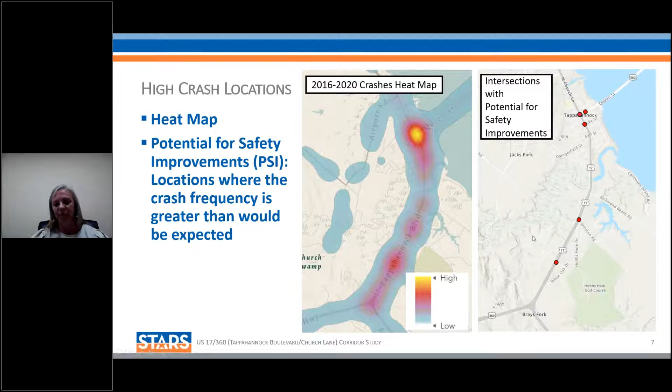All right, so that survey I mentioned—hopefully many of you took that survey last spring, we'll ask you about that in a little bit—ran from May 7th through June 4th, and there were over 1,100 participants, which is good participation for a survey of this type.

Having a little trouble here getting the next slide, but do you guys still see my screen? We do, yeah. There we go, next slide. Okay, so more survey responses.

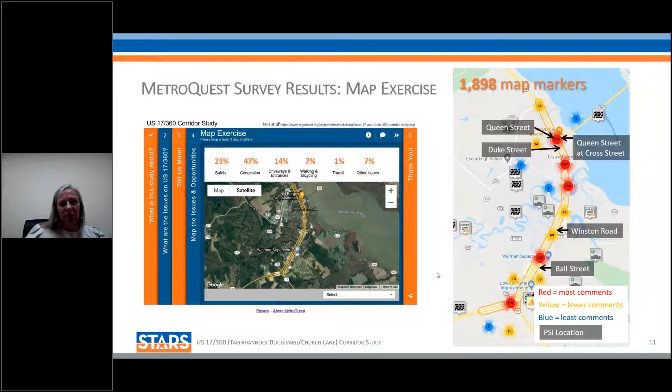This map indicates where all the markers were placed, covering all the different issues. For those who drive this every day, it's probably not a surprise that the highest number of markers were placed up at Queen and Cross. They decrease as you go south near the Winston Road area, then just north of the creek at that bridge, coming down to the Walmart, Ball Street area, and then to Brays Fork. We also have these responses broken down.

Bear with me. There we go—I think we skipped a slide. There we go, sorry about that.

Broken down by issue, this generally reflects the same trend as the total slide, which makes sense since these added together make that slide. For the congestion issue, the main concentration is right at Queen and Church, and then a bit further south near the Winston Road area intersection, tapering off as you go south.

For safety, the main location was also noted at Queen and Church, with a secondary cluster at Winston, then jumping down to north of the creek, the PSI locations, and Brays Fork. For driveways and entrances, there aren't as many markers, so fewer specific locations were marked—the same is true for bike, ped, and transit. Most concern about driveways and entrances is further to the north.

This one's a little interesting: the markers surround the Queen and Church intersection instead of being right at it, and continue in similar locations to the south. Bike, ped, and transit is very similar—markers for needs in the downtown area were the main focus, tapering off as you go south.

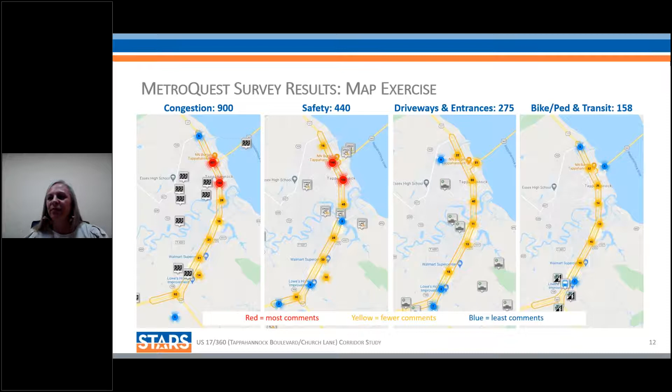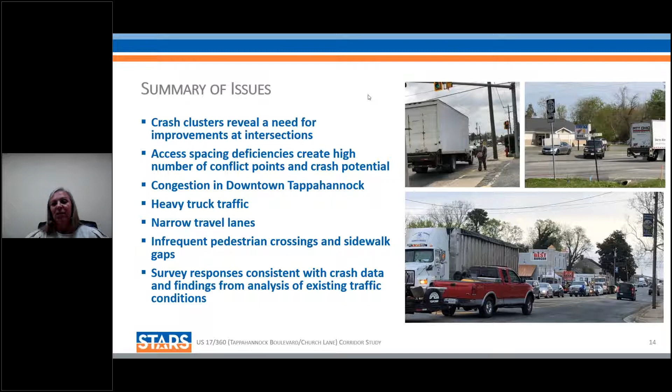One of the other issues noted was the need for pedestrian facilities, with infrequent crossings and sidewalk gaps. You can see in this picture of this woman walking, it'd be nice if she had a little more protection, and there wasn't a utility pole right in the middle of that sidewalk. One of the good things is that the survey responses were consistent with what we found in our analysis. There weren't surprises, so it gives us a better focus on what to address.

All right, so now we've talked all about the problems and what everyone has seen out there. So let's talk about some solutions.

All right, so you all know this corridor really well since you drive it every day, and you can picture the very distinct portions of it. So what we've done to talk about the solutions is broken it into different areas with very different characteristics. We're going to focus on the downtown Tappahannock area, and we have a couple options to discuss there, including some one-way streets and another option we call partial quadrant.

Then we're going to jump to the south and talk about the Brays Fork area, where we have two options, including a roundabout and a green T. And then the area between Richmond Beach Road and north of Brays Fork, that we're calling the south of Hoskins Creek area, where we have some access changes, median modifications, and pedestrian improvements to show you.

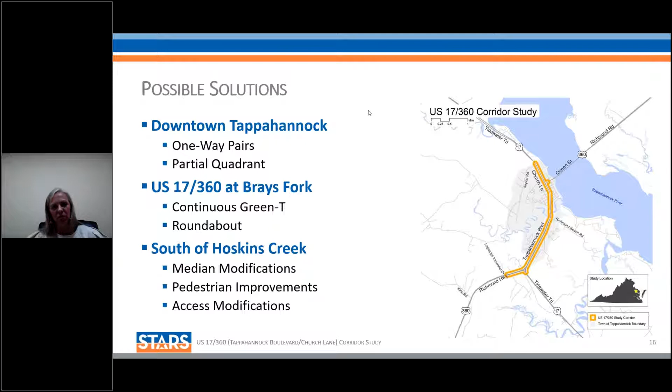All right, so now talking about downtown Tappahannock. This area, this blue circle up here, so you don't lose track of where we are, that is what we're starting with.

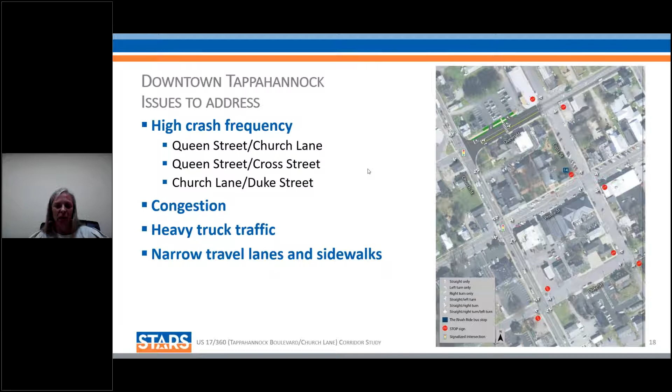Back to the issues here, the high crash frequency. This is the area with the most PSI locations, one being Queen and Church, one being Queen and Cross, and the other being Duke and Church. This is also the location in the corridor with the greatest congestion, focused around that Queen and Church intersection. Truck traffic and narrow travel lanes are also challenges in this area.

Many traffic studies focus mainly on congestion. In this case, safety is a bigger focus. However, in this portion of the corridor, congestion does play a greater role.

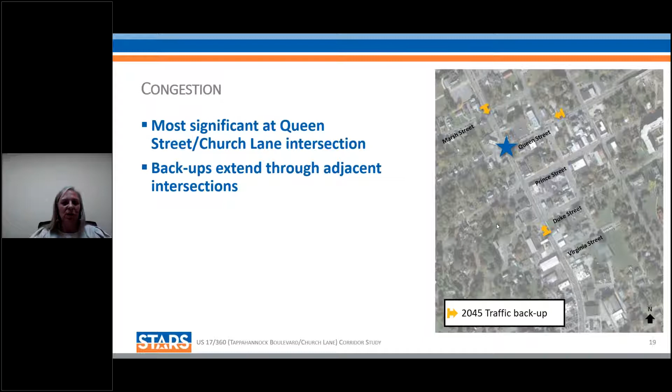We looked at many different options here, and we're not going to go through all of these with you because many of them turned out not to be viable. But just so you know, many things were considered before we arrived at the alternatives we're going to show you.

One of the things we looked at were conventional turn lane improvements — what happens if you change one lane to a through and a right, or add two left turn lanes, things like that. What we found is it was very challenging because of the trucks to effectively address that, since they need so much space to turn. So there weren't very many of those options. Also, when you start changing lanes, the congestion got worse and those backups I showed you were quite a bit longer.

Another option we looked at is what we call the road diet, where you slim down your roadway. Church Lane in this area is four lanes, two per direction, two northbound, two southbound. For one of the road diet options, we took that down to one lane northbound and one lane southbound with turn lanes. You can probably picture that here at Church and Queen it would seem helpful to have just one northbound through lane and one northbound right turn lane. Unfortunately, what we found is there's just too much traffic on this road to be handled with one lane per direction in the throughs.

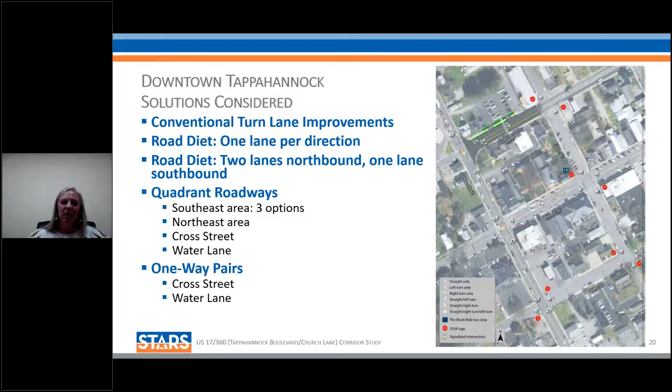We also looked at one-way pairs, the idea of creating a network of one-way streets in this kind of downtown area. I'll get into more detail about that too.

So, one-way pairs. There are a lot of words here — I'll walk you through them, you don't have to read them, though you can if you want for reference. What this option does is convert Church Lane from Queen down to Duke to one-way southbound. It also converts Cross from Duke to Queen to one-way northbound, so you can get your northbound and southbound traffic using those two roadways. On Queen Street, from Cross to Church, traffic is only allowed in the westbound direction, away from the bridge.

To offset that, on Duke Street, traffic is allowed in the eastbound direction only, from Church to Cross. So if you're coming from Brays Fork, headed north, you would come up to Duke Street, turn right, then turn left on Cross Street, and assuming you're headed over the bridge, turn right on Queen.

If you wanted to just go north, you would similarly turn right on Duke, left on Cross, then turn left on Queen and go around. That is the most circuitous or out of the way movement of those in this area.

Some other things worth noting here are that if you're coming from the north and headed south, you cannot turn left onto Queen Street. This movement is forced to come down and make the left at Duke and then come around. So that's another movement that becomes a little longer in this option.

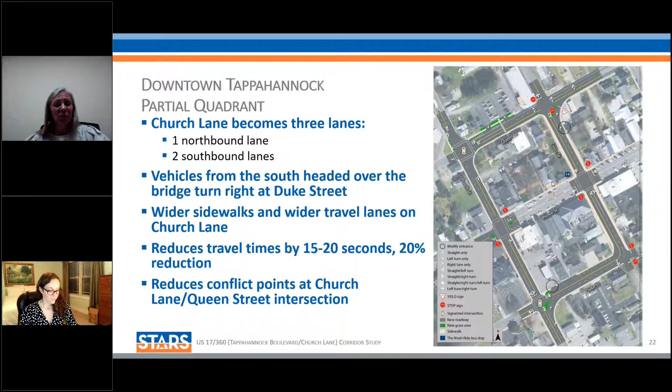Cyan says, are you suggesting that traffic, including 18-wheelers, be diverted through the residential and historic areas? Yes, that is what we're suggesting, and that is why we want to get your input on these ideas, because it's a change and it's different.

And this is the downtown area. Margaret Taliaferro asks, have you addressed the possibility of a truck route around town? I have heard discussions, not related specifically to this project, about a bypass around the area, which I believe is what you're referencing. Maybe someone from VDOT can address that at the end of the presentation, since they have more background than I do. That is not something we are specifically looking at in this study.

Good. Let's see. John Harvey asked, have you considered the fact that traffic coming from Fredericksburg will want to cut through and take a left on Prince Street?

Not necessarily specific to Fredericksburg, but coming from the north, you can see there are some restrictions here, which isn't intuitive. These little islands are intended to force you to go down to the signal at Duke and make the left there — or in this case, you can turn left at Queen. We're trying to create these alternatives so they don't take Prince, and instead actually get them to take Duke. So yes, we have thought about it and are trying not to let it happen with the design.

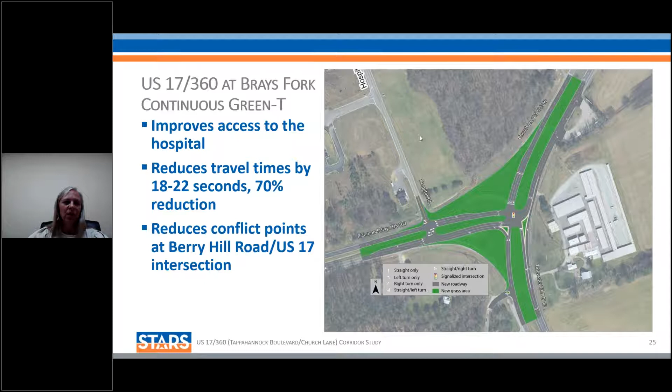And the second option being considered is a roundabout.

Similar to the continuous green T, if you're coming from the south going north, you get to keep going. You don't go through the roundabout, you just carry on and eventually merge back in with these vehicles. If you're coming from the south headed to the hospital, you come through the roundabout and have the right of way, so you can choose that outside lane and hop in the right turn lane to turn right at the hospital. So it addresses that issue.

This also reduces travel times. I'll go through the rest of the movements. Eastbound, the right turns don't go all the way through the roundabout. They still come around at a little tighter angle, which slows things down and improves the conditions at Berry Hill.

This location, for this opportunity, we also remove that crossing at Berry Hill. But this one also reduces the travel times. Things operate very nicely and smoothly from an operations perspective. It also reduces the number of opportunities for cars to collide, because roundabouts generally reduce crashes due to a combination of reduced speeds and the reduced number of opportunities for vehicles to cross paths.

And with that, I think we have another survey.

For Brays Fork, which of these concepts do you like the best? The roundabout that Jeannie just talked about, the continuous green T intersection that keeps the signal but is configured a little bit differently, or do nothing?

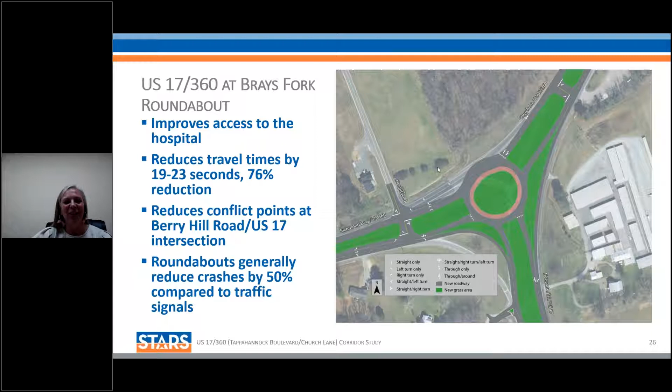So what were the issues down here? There are two intersections in this stretch from White Oak to Richmond Beach Road that had higher crash rates than expected, the PSI locations, one at Winston Road and the other at Ball Street. Also in this area, there are some closely spaced access points, which I'm going to highlight in a different analysis in a moment. And there's a lack of pedestrian facilities. There aren't any sidewalks, it's very hard to cross even at the signals, so it's just not a pedestrian-friendly area.

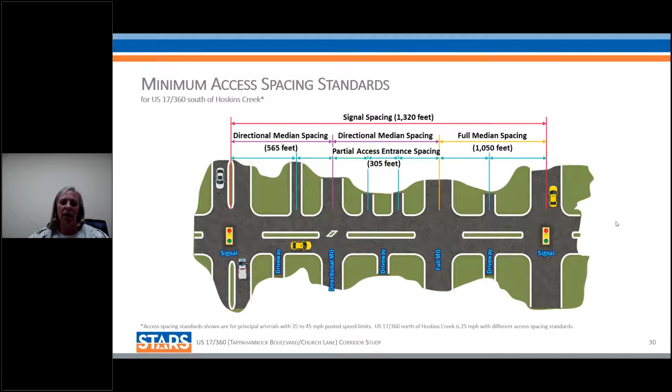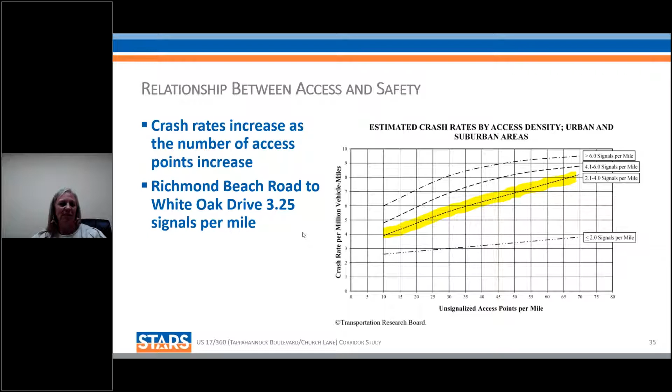All right, so all of that to get to this. I realize this is small and there's a lot of information, so I'm going to try and hit on the high points. Also, all of this information is on the project website if you want to get further into it, and you can provide additional comments, and we'll show you where to find that.

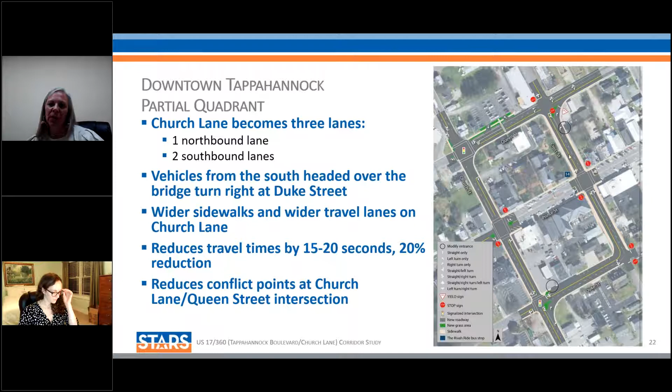This is the partial quadrant option that I'm showing right now. Here at Cross and Queen, for those who may not be as familiar with what Eric's asking, this is actually a free flow right turn, so you don't have to stop, and that allows for enough capacity that you don't need two right turn lanes. Going down, this one is yield controlled and it's enough. I think what we found is the traffic volumes in that northbound direction are almost split half through and half turn right, so separating them out a little bit increased the capacity enough at the intersections that it worked.

Does that answer your question, Eric? It answers my question, I guess. Agree to disagree. Reasonable minds differ, and I think for future traffic flows you'd want two right-hand turn lanes, but if that's what y'all came up with, then I guess we'll just agree to disagree.

Sarah Lavica asks, I think this is in regards to the downtown area, how about a roundabout in the downtown area?

So we did not consider that based on space. A roundabout takes quite a large area, and given the historic nature here, it would have taken out a number of these properties to fit one in, especially given the truck traffic having to maneuver through it. So no, we did not consider a roundabout downtown.

Okay, a few comments here that I will read. Margaret says that overwidth machinery, such as farm equipment, is an issue that needs to be addressed.

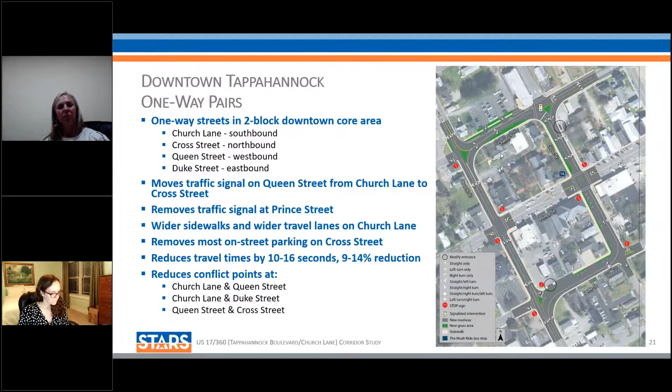Thank you for those comments. This one is about the Winston intersection: the Winston intersection changes have increased congestion at the next northern intersection, and it needs lines.

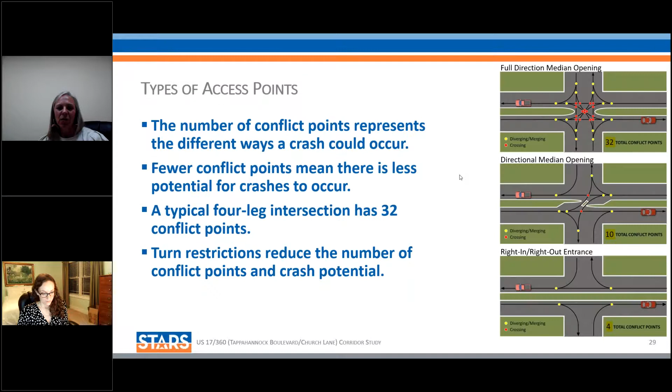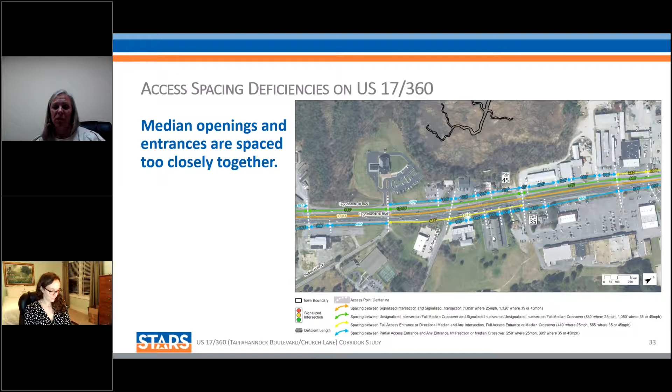My guess is maybe the markings have not been placed yet. Here at Winston, yeah, it may still not be marked, that's possible because it's very recently constructed. And yes, it is possible that there is more congestion at the next intersection because traffic volumes shifted, especially to make that U-turn. It's one of the challenges, making sure that it's a system that works together.

Great. I'm going to keep rolling here to read the questions and comments that keep coming in, but I'll also invite the other panelists, Stephen, Linda, Pavneet, if anyone would like to jump in with a response, feel free to do so.

This relates to downtown: a few of the power lines that cross the downtown grid are not even close to regulatory height to accommodate tractor trailers, one reason, aside from the turns, that they avoid them at present. We have even set regulations on what we can accept for the Christmas parade because of the lines hanging low across the streets. Sorry for all the input, but I think the Hoskins to Brays option is great, but downtown needs more research and holistic solutions based on existing ground conditions that better consider detrimental impact.

Thank you, we like the feedback. Yes.

Travis notes, and Travis, you may need to help give a little more context to this comment, he says you cannot get to the plumbing supply store from the parking lot. Do you know what Travis is talking about?

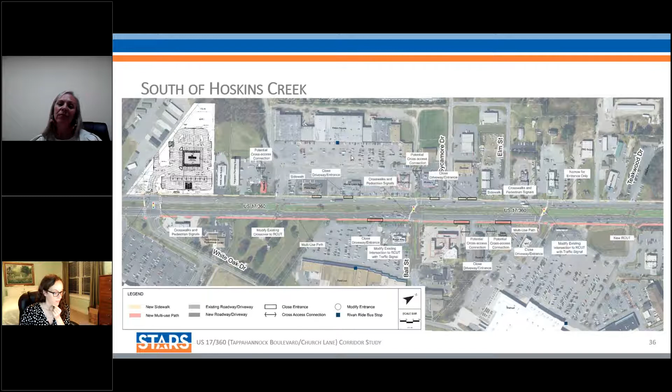Kathleen notes that the survey overwhelmingly favors commuters, that is, those who do not live on the streets that will be impacted. And secondly, she says, I should not have to find out about these proposed changes through the kindness of a Facebook friend. I think VDOT should hold the local jurisdictions responsible for informing their citizens of these proposals. Don't rely on our local leadership, it won't happen.

So thank you for that comment, Kathleen.

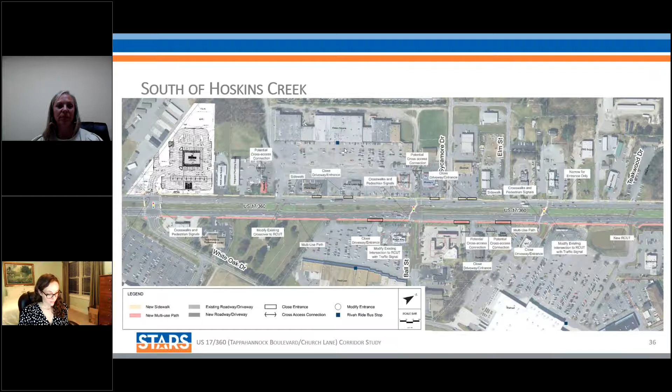Travis raises another question for the section south of Hoskins Creek. He says there's a new hotel at Hobbs Hole Road that is not added. Will that significantly change traffic at that entrance? In our traffic projections that we based the analysis on, we included the traffic expected to be generated by that hotel, I believe the Hampton Inn. So it has been considered.

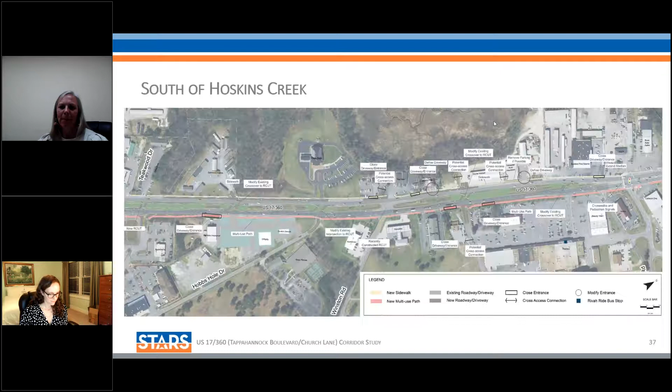Thank you. Yes, there's the end of Marsh Street runs along the old airport to the south, and Airport Road runs along it to the north. They have Commerce Road that technically connects them, but I believe it's either gravel or loose seal or whatever on it. But it is considered Commerce Road. If those were connected, it would connect the bus garage and the intermediate school to the high school. So that would potentially mitigate a ton of traffic, not only for that area, the schools, but also people coming through there, and Marsh Street residents.

But further, there's also the end of Marsh Street beside the Little League field that also has the end of a neighborhood road right beside it. And if that was connected, that would be another left side road, more residential level, but that would be a residential grade road that people could take all the way to Airport Road without even having to go through town, if they could essentially turn at the town office. There was also a road behind that building that they could technically turn before the town office, if that was still there. That was Dock Street.

Okay, another connection. So if the ends of those roads were connected with a sort of just a bend road, it would allow the feeders to feed that east and west, and it would also mitigate some of those people that are turning out to go ultimately north or back into that area and turn back down Airport.

Thank you, that's an interesting idea. Can you guys, I'm looking at the map while we talk about this. Thanks, Meredith. The school was actually trying to put together and trying to figure out how they could afford to do it. So if it could be something done through smart funds or however, it would really help their traffic. The kids that go to the high school for sports and different things, it just would be far more efficient. You wouldn't have to go all the way through town. Great, good clarification.

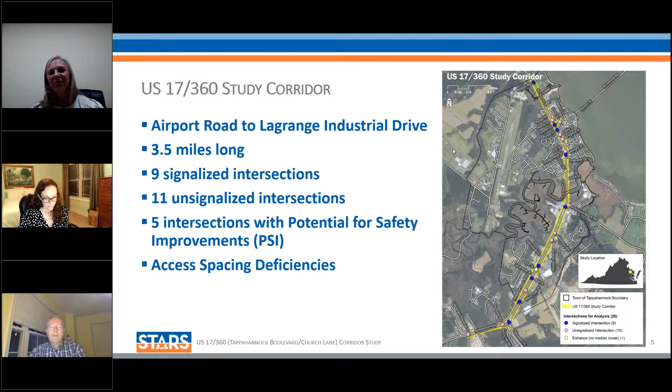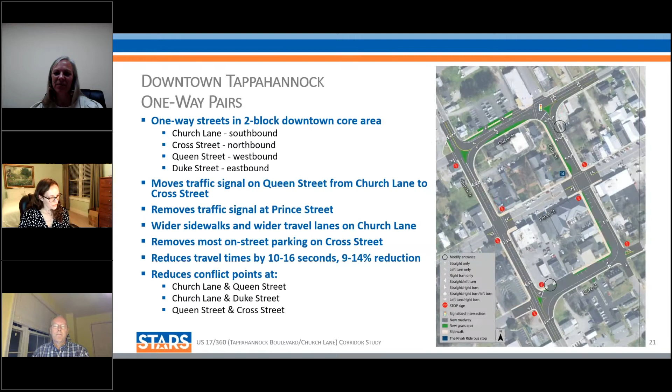Meredith says she agrees with Cyan: a truck bypass using Mill Road to the side of Hospital Road, providing better hospital access, could in the future connect to the new LaGrange Industrial Drive. And then Eric says any comments are welcomed. Eric is the town manager for the town of Tappahannock.

So great. Okay. I do not see anyone else with their hand raised, and I do not see any other comments coming in. Oh, I spoke too soon - Kathleen says, Cyan is right, I live on that street. I have to dodge cars to get to my car, I don't want to dodge trucks too. Thank you, Kathleen. Okay.

Travis asks, is this the only public comment? I believe the answer is no, this is not the only public comment. You can submit comments anytime. Jeannie has up on the screen the fred.comments@vdot.virginia.gov address you can submit your comments to. You can also take the MetroQuest survey to respond specifically to the potential solutions that Jeannie talked about. On the MetroQuest survey, it will ask you to give a star rating for each of the concepts, but there is a little speech bubble icon you can click on to submit your comments for each individual concept or solution, if you'd like, that way as well.